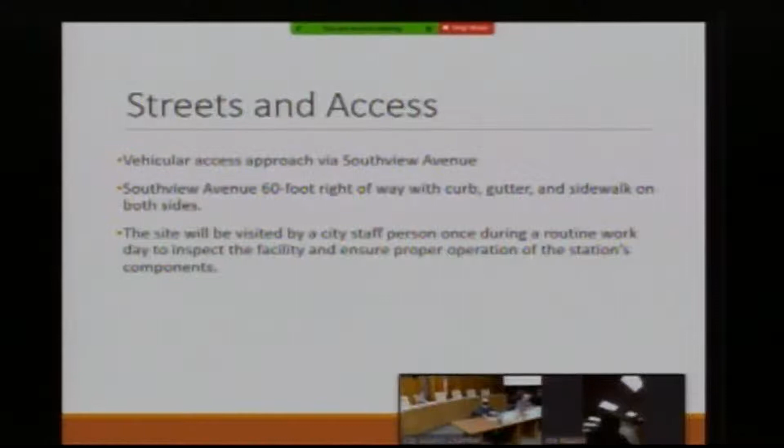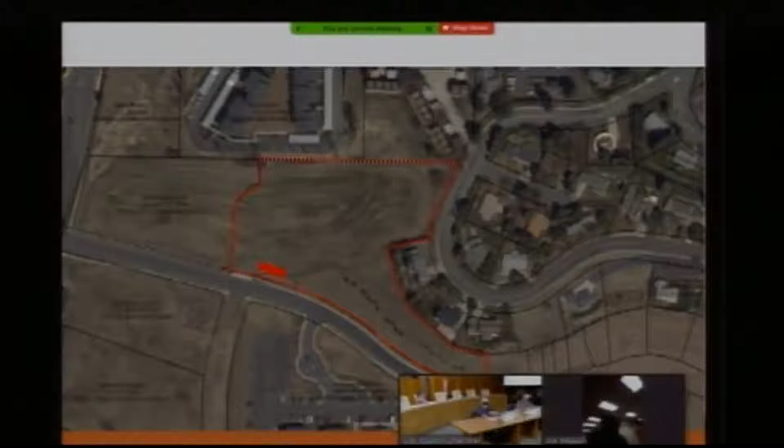As I stated before, this is the parcel with the location of the housing station. This is an image of the site plan showing the contours of the topography at the site. It shows a steeper slope to the east, with more gradually sloping topography on the north and south.

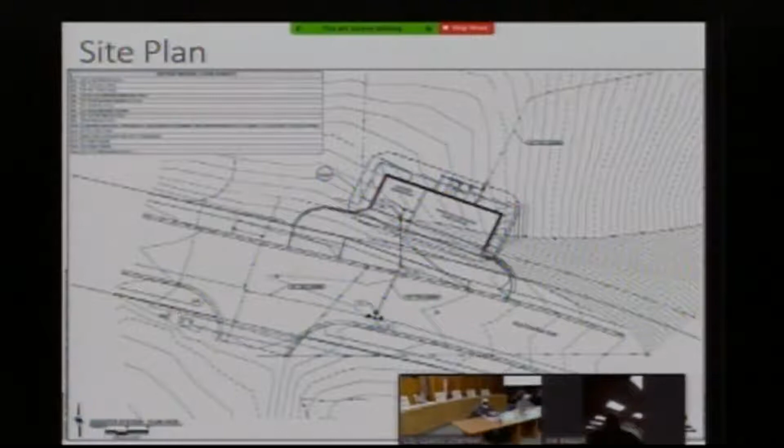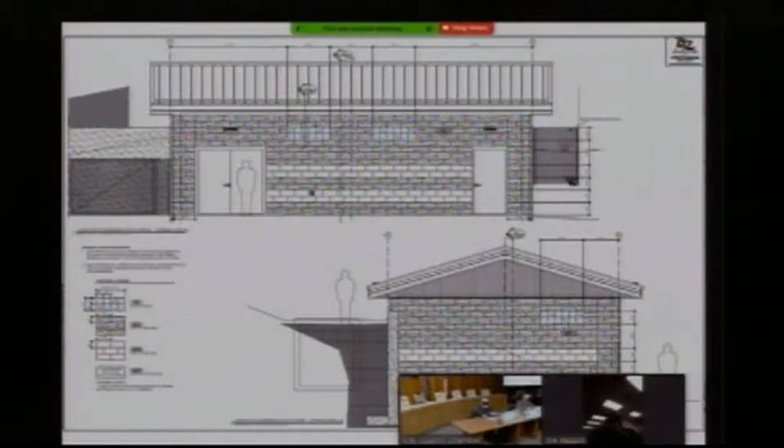Again, a closer up of that substation. Here are elevation drawings showing how this particular booster station will be set back into an excavated portion of that topography, and again from the other direction.

I'd be happy to take any questions, or we can proceed to the other location and take all the questions at the end, whatever you'd prefer.

Does anybody have any questions on this one? This is the one south of town, near where they're putting the new police station, is that right? Correct. Any questions based on that, or we'll just move on? No, I'm good.

I suspect that the next one is going to be very similar to what we're talking about, so please listen to the other one as well. All righty. Switch over.

Okay, so the next conditional use permit application is for the location at 1250 Orchard Avenue. As I stated before, this is a conditional use permit submitted by the City of Moscow Engineering Department requesting the conditional use of a public service and utility facility located at 1250 Orchard Avenue.

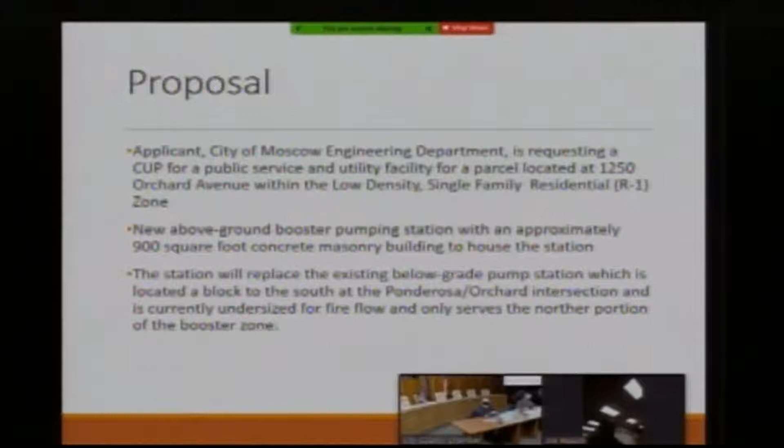This one sits in the low-density, single-family residential zoning district. This booster station will be housed in a 900-square-foot concrete masonry building. The station will replace an existing below-grade pump station, located a block to the south at the Ponderosa/Orchard intersection, which is currently undersized for fire flow and only serves the northern portion of the booster zone. This is also a new station identified as a capital project within the City of Moscow's 2012 Comprehensive Water System Plan.

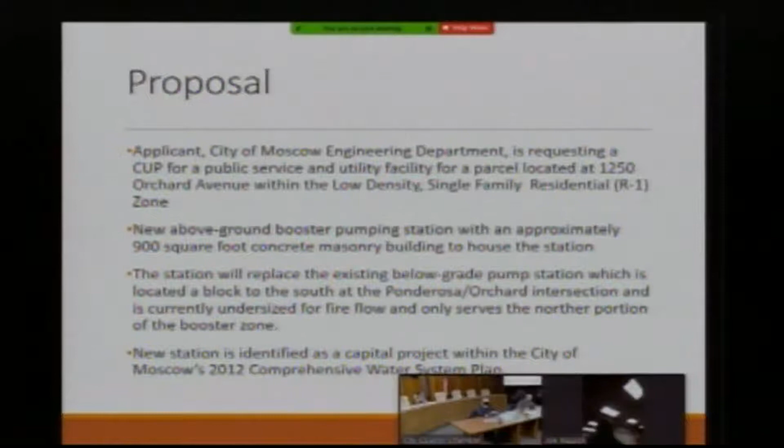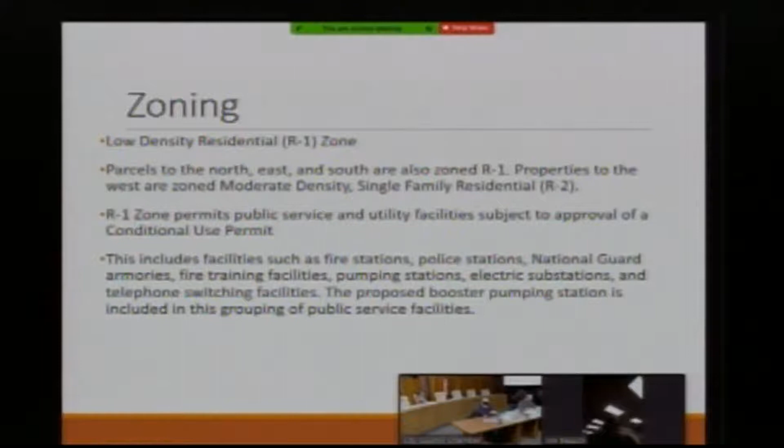Within the R1 zone, public service and utility facilities are subject to the conditional use permit as well. This includes facilities like fire stations, police stations, National Guard armories, fire training facilities, pumping stations, electric substations, and telephone switching facilities. The proposed booster station is included in this grouping of public facilities.

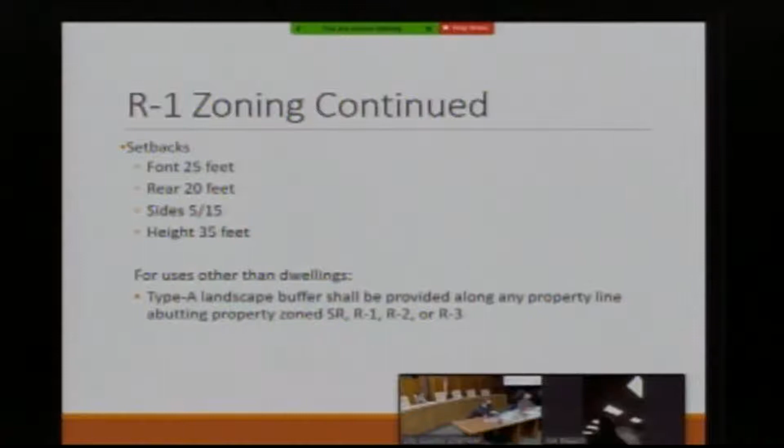To continue with the zoning, front setbacks for R1 are 25 feet from the front, 20 in the rear, combined total of 15 on the sides with a 5 minimum, and height is limited to 35 feet. Again, for all uses other than dwellings, they require a type A landscape buffer, which does apply in this case. This substation will have a type A landscape buffer around the perimeter.

Vehicular access is via Lanny Drive. Lanny is a 70-foot right-of-way with curb, tree lawn, gutter, and sidewalk on both sides. Orchard, just west of Lanny Drive, is a 45-foot paved right-of-way with intermittent curb, gutter, and sidewalk primarily only on the east side of the street.

The site will be visited, as the other one will, by a city staff person just to maintain proper functioning of the facility. Subject property is here. This is looking west from Lanny Drive and south from Orchard Avenue.

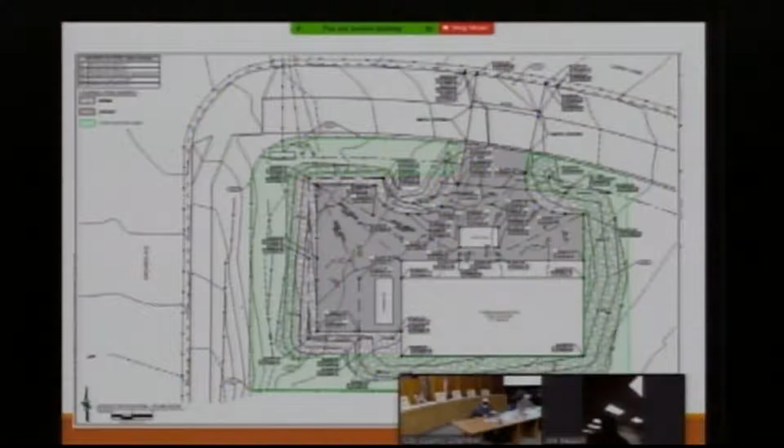Elevations of this particular property, not intended to be excavated, will sit right at grade.

Again, here we have our relevant criteria and standards, which you're familiar with. And it is for those reasons that we recommend approval for the booster station located at 1250 Orchard Avenue. I'd be happy to take any questions on either location at this time.

Thank you. Anybody have any questions? I have a clarification question, I'm trying to find where I read it, but I think it applies to the Indian Hills site. Isn't it planned to have a park around it, so a landscape buffer wouldn't necessarily apply to the initial construction on that side? It is true, yes, that it is intended to be constructed within a park that is to be developed in the future. R4 does not require it to have a landscape buffer, but it will have quite a buffer, being that it is surrounded by the park.

Any other questions? No, not of staff, no. Thank you very much. All right.